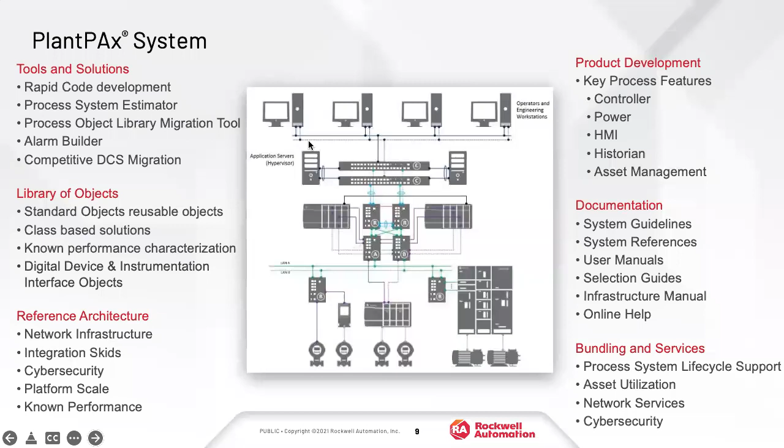So realistically, a lot of the times what we'll see as part of a PlantPAx system are the tools, the libraries, the standardization of all the blocks and objects that we have, tons of documentation around reference architectures, and then also key releases that we have specific to either the process controller or things of that nature. So as we go through, we're going to be talking a lot about PlantPAx, but it's not going to be specific to just that. We can use a lot of these tools outside of that, because in reality, what we're looking at is CompactLogix, ControlLogix, Studio 5000, FactoryTalk View SE, Historian, and AssetCentre. All of those are part of our process system that we'll tie into.

When we look at a modern process solution, like I said, we are looking at PlantPAx in the foreground, but as part of that, PlantPAx is a characterized system. So all of the documentation, the tools, the mechanism of how we implement the system, everything has been characterized and documented.

So a lot of the tools are built around that. Application Code Manager being one, so that allows us to do the bulk code instantiation. The instruction sets, so we have the process library that you can import and export, and you also have the new instruction sets that are going to be tied specifically around the newer controllers, how we handle alarming.

And then in terms of what we're seeing on the bottom end side, again, integration into power, integration into motor control, the ability to do redundancy. So typically my joke is how much redundancy is too much redundancy. We are seeing that here in the process system where we have redundant controllers, redundant IO, the ability to do redundant switches and servers. It just depends on the application set that we're looking at.

And then even safety and the scalability piece, as we go through, we can scale this down to a single station solution where it's a single monitor, single controller, all the way through a full control room environment, multiple servers, multiple controllers. We actually have an example architecture at the end, just so you guys can see some of the capabilities.

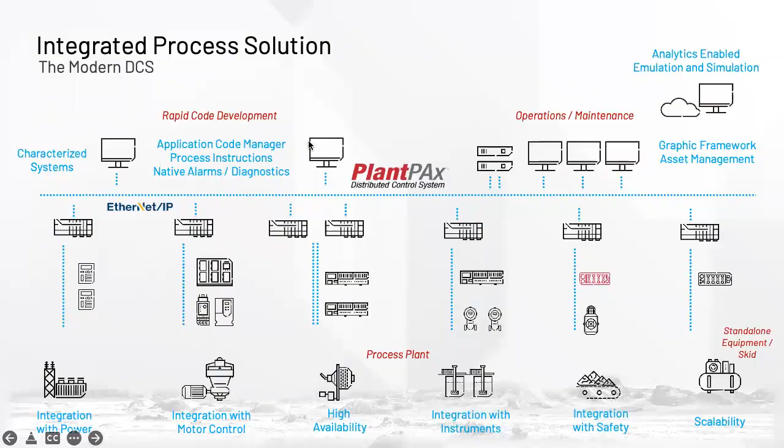But in terms of what we're looking at for a newer update, as of June, we will have the release for 5.10. So this is a smaller system release update to PlantPAx. When we do the release, Rockwell will also release documentation that goes with it. So as I mentioned, it's a characterized system, meaning that they've now characterized it to all of the new feature sets and the newer software packages that they're going to be coming out with. Along with that, some of this has already been released. It's just a matter of having that documentation that ties into the process side of it.

So last user group, we talked about Logix Echo. That allows us to do emulation of a process controller. So that'd be the newer high performance ControlLogix platform, but the process variant that can be emulated inside Logix Echo. So you wouldn't need the actual controller to be able to do an HMI and code implementation.

A couple of the other things that you'll see there: power integration. There's a new ProSoft module that allows you to do 61850. So usually it's a Schweitzer relay or switchgear kind of communication that ties directly into the ControlLogix platform. Some updates with how we handle OPC UA alarming and security. That'll be built into the documentation.

And then what we'll talk about in a little while is some of the newer updates to the infrastructure. So the virtual templates that we create on the Rockwell side, what we implement for PASS is Process Automation System Server. So in layman's terms, it's the FactoryTalk View server image. We'll have a consolidated version. The consolidated will also now include Batch. So you'll have FactoryTalk View, Historian, AssetCentre, and Batch all in one virtual image template. You can either do that in a virtual environment or a physical box.

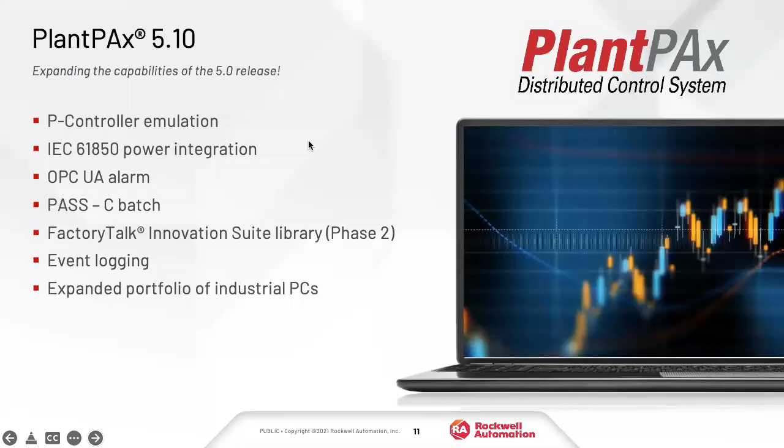In terms of the process controller, if you guys haven't seen this already, more than likely you probably have. In CompactLogix and ControlLogix, this is the newer high performance feature set. There's now a process variant. This released as version, I think it was 33. So it was October 2022, I believe. So these are going to be process out of the box.

A few of the changes that you'll see is they got rid of the continuous task when it comes to process. Process is typically using periodic tasks, so it also defines the speed of the tasks that are being used. The biggest change with a process specific variant is that it has the process instructions built into the firmware. In the Studio 5000 environment, as soon as you load up the firmware on the controller, you'll see a PlantPAx subset of instruction sets already built in. They don't have to be imported or exported.

So when Rockwell creates a PlantPAx 5.0 library set that ties into all of the faceplates and the way that we handle alarming, all of that is tied into the firmware instruction sets that are already built in. So when they moved from V33 to V34, it's part of the firmware update. There's no library piece that needs to be updated outside of that. Everything is handled as part of the controller. So any future upgrades in the process controller, whether it's CompactLogix or ControlLogix, are just updated via the firmware. So that is a huge thing.

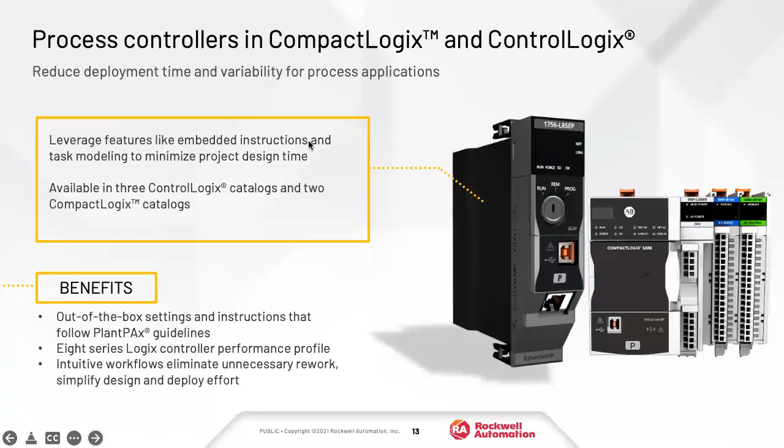Inside of process, whether we're talking about PlantPAx specific or just process in general, we can still support architectures with an L7 or an L8 standard type controller. But if you are looking for the feature set where you keep that instruction set built into the firmware, it would have to be the process controller. So just keep that in mind. Some of the features that we'll talk about are going to be specific just to the newer controllers, not necessarily to the process controller.

So as more things are added to PlantPAx, that'll be added in later firmware? Right. Correct. Yeah. Firmware levels are better aligned, so I don't have to say, okay, version 34, what version of PlantPAx is it at? Correct. So at some point it gets more recognizable.

Yeah, so the idea with the PlantPAx system releases, like I mentioned, they released 5.0 as of June. They'll be at 5.10. Part of that characterization is telling you what version of Studio and controller firmware you should be using, including all of the software packages. So when 5.10 rolls out, they'll also update the revision of what controller you should currently be at, including version 12 or 13 of FactoryTalk View SE, Historian. All of those pieces will come bundled in.

So what they're planning on doing is any newer releases going forward, because what Rockwell will probably do, if I'm seeing the writing on the wall, is they had the 5.0 release, they'll have a 5.1. I fully expect them to have a 5.2 once they have newer updates. Anytime they release new updates, they'll update the documentation and potentially move that into a new firmware update specific to the process controller.

There's a migration path if you have an L7 or an L8 and you want to move to that same feature set. But what Rockwell is trying to do, as we get into more of the process or PlantPAx space, is tie that directly into the firmware releases so that it's an easier transition moving from one system to another.

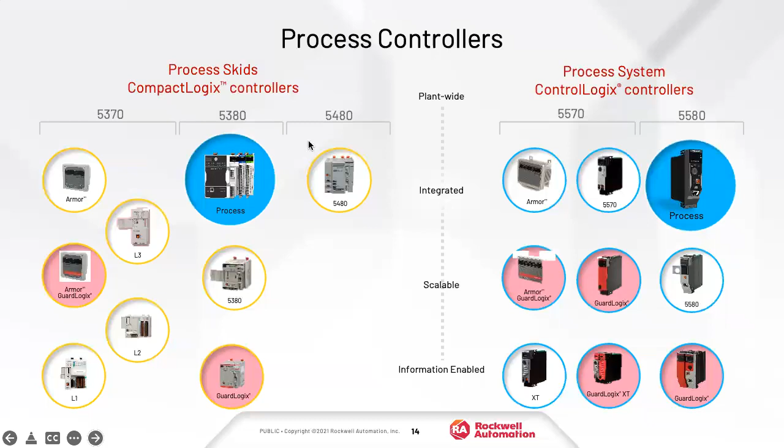Oh. There we go. In the newer controllers, this does not have to be specific to the process variant. So this is looking at the 5380 or the 5580 ControlLogix, CompactLogix. We've talked about this in the past, but it's worth repeating. One of the bigger updates that we've seen as of version 33, 34 for Studio 5000 is the implementation of automatic diagnostics. So what this allows us to do is it's an automatic push from the controller to the HMI. So FactoryTalk View SE will automatically get information regarding the diagnostics part of it. It's using the alarms and events portion, but this is essentially just a little checkbox inside of the controller to say enable. It's automatic diagnostics, something or other.

So what that allows us to do is now see broken wire status information, and it's not only the controller status, but it's also the adapter and the IO per channel. So in the past, most of you probably have created some type of GSV to get the status of an IO card, or created special AOIs just to do that. Now it's built into the system using the newer feature set. So it has to be the newer controllers, and it has to be the newer IO as well. So we're talking Flex 5000, the machine IO, so the 5069 flavor of the IO, all of those are capable of it. You will not see this with the older style IO or the older style controllers. So another reason why when we're looking at modernization, we're trying to push to make sure that you guys are at version 33 or above.

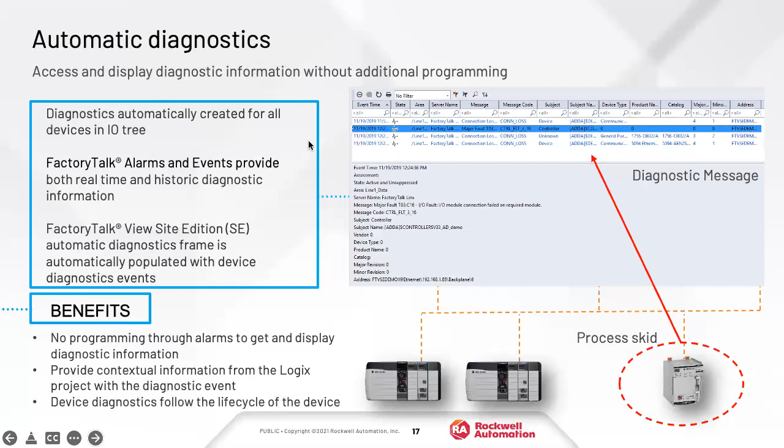Update on HART. Again, this is specific to process in general. It doesn't have to be specific to PlantPAx, but it's what comes along for the ride. As they do updates to PlantPAx, we are getting all the new tools and feature sets. This was introduced as of V31 and is specific to the Flex 5000 family, a new feature set that only exists in the newer technology.

When we're looking at Flex 5000 and the newer controllers, the 5380 and the 5580, this now ties in, and they call it highly integrated HART. We still have the capability of bringing in all the HART sensors. We have specific IO cards that are analog HART modules or analog out HART modules. What this is doing is that the HART device is now part of the IO tree.

So in the past, you've gone into the IO card, set up the configurations that turn on the HART, and you're getting the process variable along with all the HART variables. It didn't necessarily specify what device was on the other end. You would have to use something like AssetCentre or an AMS system.

What they're doing now is inside of Studio 5000, in the IO tree, you would actually get a full listing of all the devices that are being tied to it. The devices themselves will come with an add-on profile, so you can double click on it and you'll get a full little window. Eventually, it'll get to the point where it's doing the same thing that AssetCentre was doing, where you can see a full device manager inside of Studio 5000.

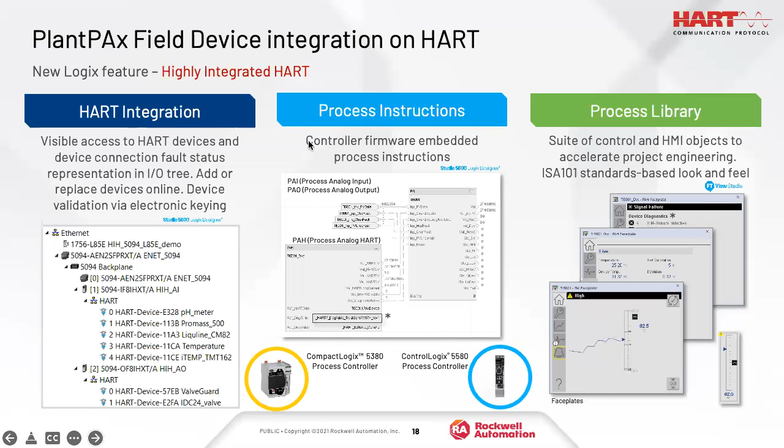Another feature that we typically have not covered, and it's something for anybody that's doing either PlantPAx systems or just a process system in general, as we move towards integration into FactoryTalk View, what we're also looking at is the ability to own and organize based on equipment design. So a lot of the time in a process environment, we're doing a lot of loop tuning. So you have dependencies from a valve, a motor, a block, those analog signals.

What you can now do is implement an actual organization structure that's built into the HMI itself once it's all there. So if you have any dependencies where something needs to start up before you get an alarm somewhere else, you can now do that arbitration and do it directly from the FactoryTalk View SE system. So that is built into the tools as part of PlantPAx. Again, it could either be part of a full DCS environment for a larger system, or you can just be looking at this from a controller to HMI system with FactoryTalk View as a full process implementation.

So documentation is already there. If you guys need to do some labs or get a little bit more information on it, just let us know.

Sometimes this is used in some regulated industries where you have to provide some kind of documentation about arbitration or about ownership, like in pharmaceutical and those kinds of things. If you're familiar with the S88 documentation standard, that's what this allows you to follow easily. So it may not be so much in oil and gas, but in some of the regulated chemical industries and pharma, you might see this. And so it just helps in the organization of your HMI development.

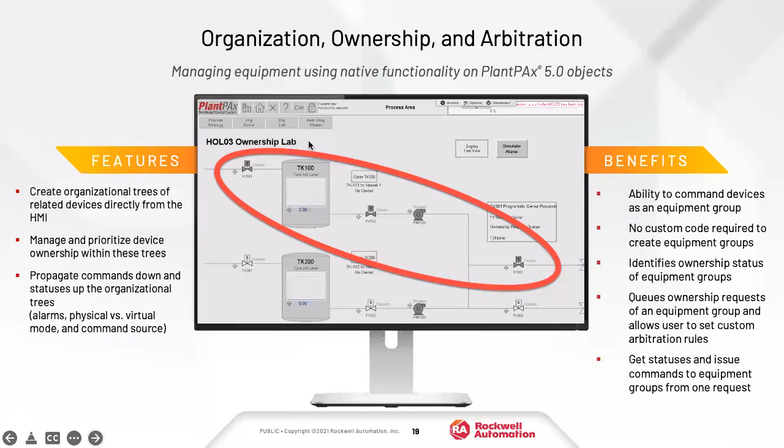As far as implementation, if you guys are following PlantPAx letter of the law, there are documents that you are fully expected to read. I won't actually ask you if you did, because I don't want to get sad. But there's documents in here.

So anytime they do a system release, as I mentioned, there was a 5.0, there's a 5.1 selection guide, configuration and implementation user manual, and then also a full listing when it comes to the library objects. This is going to be specific either to the instruction sets that are built into the process controller or to the library that exists outside of the process controller that you can import or export. So that provides you all of the information, a lot of the documentation that you can get into.

One of the examples that we get into is if anyone starts asking about how do we set up security inside of process or PlantPAx specifically, usually what we see from Rockwell is following the IEC 62443. Specifically on this one, it's the 3-3 compliance. So this is how we actually implement the system. So when we're looking at how do we handle access control, the zoning, the conduits, the tie-in for the implementation of FactoryTalk security, all of that is documented inside of that same document that I mentioned.

There's a little appendix A, which is a PlantPAx security certification. So you can go in there and it gives all of the examples and what you're supposed to tie into, even how you're supposed to set up some of the networking devices. So it's documented, it's there. So anytime you guys are looking at it or a customer is asking about it, this is where we would go on the Rockwell side.

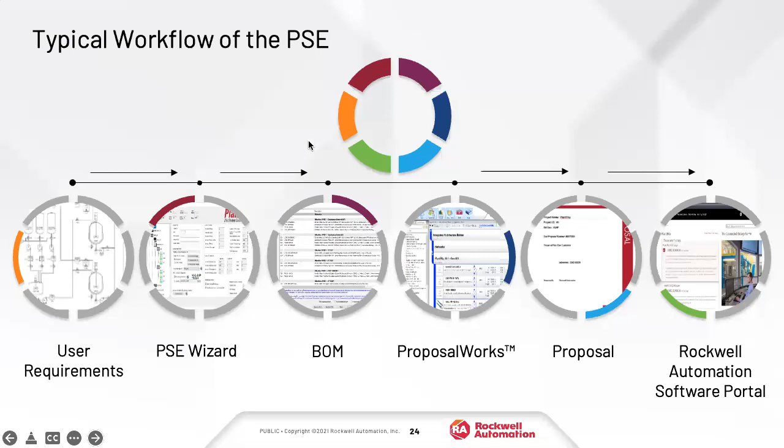And anytime we are looking at a system integrator that is doing a full PlantPAx 5.0 system, that is one of the main requirements, that it has to go through the process system estimator and have that fully documented. Once we get that, we have the bill of material, we can go into a proposal, and then we go through the system of how we're going to order everything. Same thing when we look at this. So that allows us to define hardware.

It's not only the controller, but it's also the networking piece, the software that goes with it, and even the server configurations. So if you're thinking of doing a full virtual system with ThinManager, thin clients, a bunch of remote sessions, all of that would be documented as part of the bill of material, including how we would go about putting a network together. So just be aware that it's probably a little bit more powerful than you're used to.

On the integration side of it, we also have configuration tools that are specific to PlantPAx. So again, you can use those for your standard process design. These are how we would set up the interlocks, how we set up the alarms. And then at the end of a system, once the work is done and you're getting to the point where you're doing a FAT test, a SAT test, there's tools in terms of PlantPAx and process for a verification validation tool.

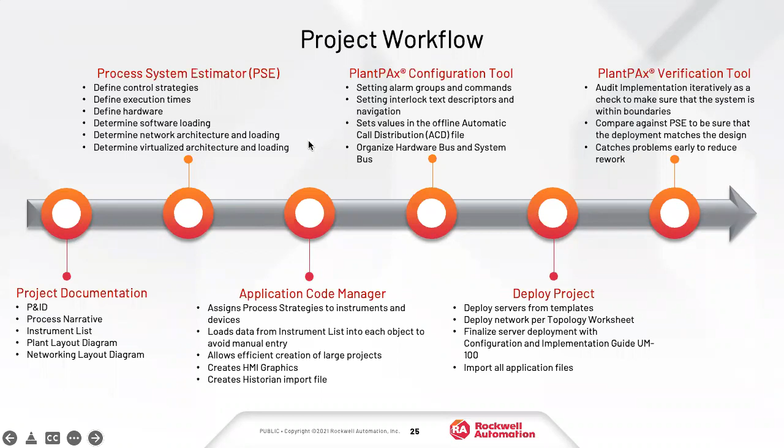So these are, last I checked, about 8 spreadsheets that allow you to tie into the control system to make sure that everything that you said you were going to do in the estimator actually came through, as far as how you did the design, how you did the system, and make sure that you're green across the board, essentially. So if you haven't seen those and you are doing a process or a PlantPAx system, I urge you to get that. They're in the same spot where all the drawings are. So in that documentation, at the beginning part of it, there's a little link that allows you to pull down a little verification tool via the knowledge base.

One update that came out as a part of PlantPAx, and it's a big one when it comes to how Rockwell is implementing their systems, is there's now what's called a system ID. So if we're looking at a full process system, typically the support structure for Rockwell was, okay, you have controllers, you have switches, you have software, everything is separate. So you call in for support and you're calling against a specific device.

So what they're moving towards, especially in a PlantPAx DCS environment, is to have a unique identifier for the entire system. So when they call in for support, it's tied into the entire system. They know everything that's there. To get to that point, we use the process system estimator, pull that into proposal work so that we have a tie-in. There's a bundle that gets purchased through the software portal. It's going to be specific to PlantPAx, so it's the PlantPAx software bundle.

And the unique identifier will be the serial number for the process automation system server, which is, again, FactoryTalk View SE. There are mechanisms to be able to take older systems, move them to newer systems and get a system ID. There's also ways of being able to buy everything piecemeal and still have a system ID, but you have to go through steps to make sure that happens. Typically, what we're trying to do is any newer system that's going out, if it's PlantPAx, you buy the bundle, you go through all the steps, you get it audited afterwards.

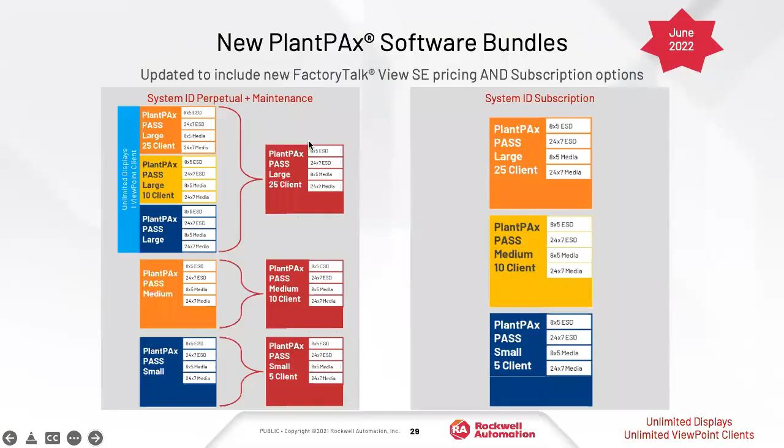So one question that came up is: on the Lite stations, do the standard PlantPAx objects count towards a display? Yes. If we're looking at just a 25 display count, typically when we're bringing in the process library or even the library that exists for the instruction sets, we're at a count of about 80 faceplates. Granted, you don't have to use them all. If it's a smaller application set, you can get rid of anything that's not being used, but you have to do that extra work and understand whether or not you can fit that in a 25.

I will be honest, if we're talking PlantPAx or even some of the process systems, I almost always want you to be unlimited. So take a look at the pricing that's been updated, because in most cases the unlimited is still at an extremely competitive price point now with the update. But yeah, if you're at 25 displays, anything that's a faceplate, a trending screen, a navigation screen, all of that goes against your count.

If you're doing the, we'll define stackable, you're talking about like buying two? No, because essentially SE still doesn't let you do an additive piece, so you can't just add display counts. If you were to buy 2 Station Lites, you're essentially installing that on 2 separate PCs. Right. So you would have to split the system. Let's say you had 2 PanelViews and you split the system so they're doing independent items.

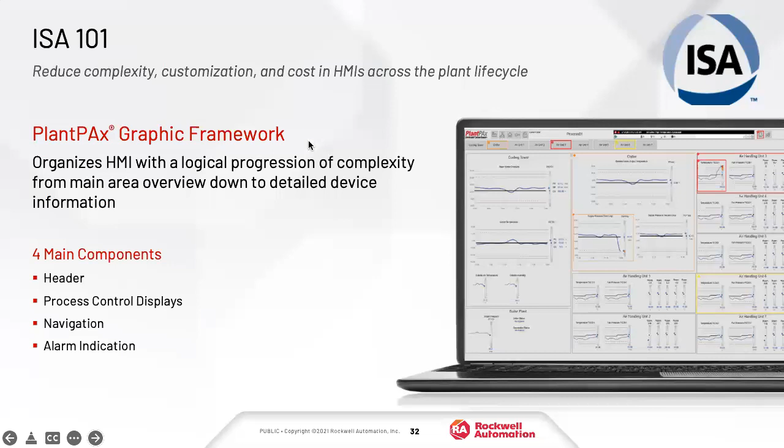And we're seeing customers, end users, OEMs, et cetera, that recognize the significance of this, and this is driving some migrations and opportunities, because they're recognizing that maybe their facilities are not run in the most efficient or safest way they could. And so we're seeing a lot of customers adopt this ISA 101.

And so the research says that trends are good visual tools to show an operator what's normal. So you have a trend that would be in a kind of a normal band, and then you have sort of abnormal bands. And these are typically real-time trends. They go back a certain amount of time, maybe 10 minutes, maybe an hour, depending on the process. So an operator can look at that trend and say, oh, that doesn't look like it normally does. Let me click on it. And then you can go into a deeper or more focused screen.

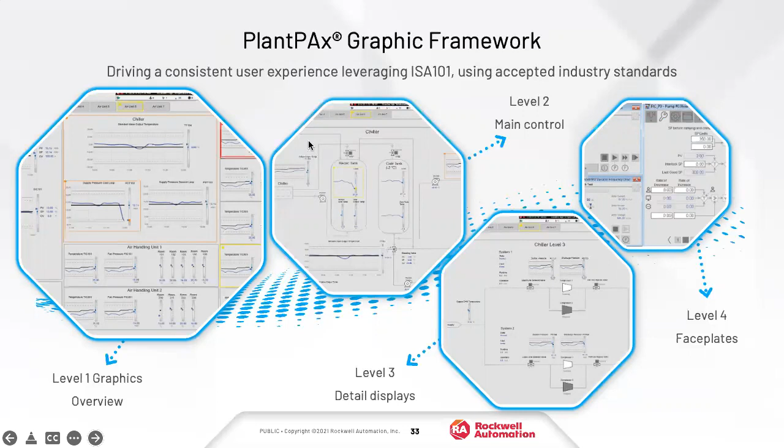So a red would be something, maybe a high alarm. And so you'd want that operator to be able to simply select the buttons where the red lights are on, and that's going to take you to where the problem is. That's the concept of what we call breadcrumbs. This is all built into PlantPAx and how the faceplates and the instructions work, and it's just something that gets configured as you develop your HMI package.

A cool little feature that you don't normally think about: when you're looking at the navigation side of it, the little black bars are actually telling you what level and what screen you're currently in. So when you're seeing the entire graphic framework, not only are you seeing the breadcrumbs of any alarms or actionable items, but you can quickly see what area and screen you're currently at within the different levels David was talking about. All of that is built into what Rockwell created, and it's all available for you, including all the documentation. So it's not anything that you have to create.

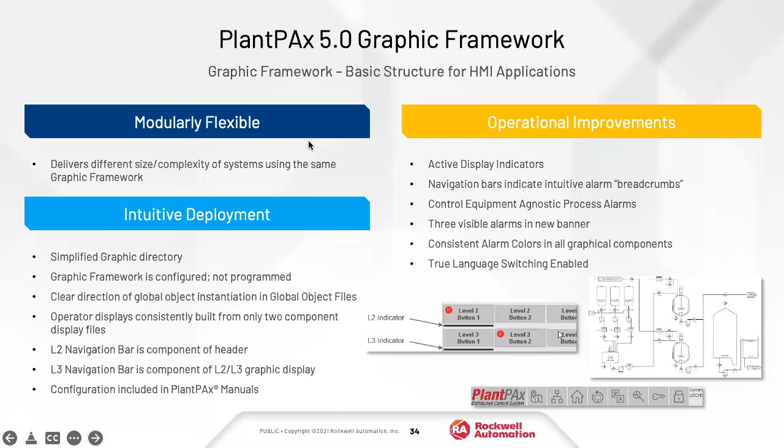Right. And so certainly alarm management is a critical piece of ISA 101. Like we showed in the beginning, in the top area you're always going to have a small three-row alarm banner on top of every screen. So again, if there's a red circle up there, it's something you might want to investigate further. You could click on that and get to your full alarm summary, and in the alarm summary you can do all kinds of things and manage your alarms that way.

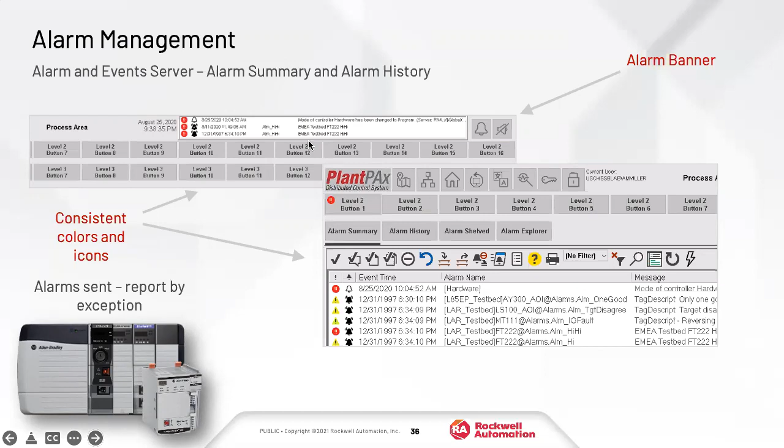You could layer hardware IO diagnostics on top and look at it on a display screen. So if you had a transmitter that was out of whack, maybe that diagnostic would show you there on the screen: oh, I lost this point, I need to go in and change my IO module or something. The ability to layer event data on top of historical process data is a nice feature, so you don't have to go hunt and peck somewhere else to troubleshoot what's going on with the system. That came in, I think, in version 11, and now we're on version 13.

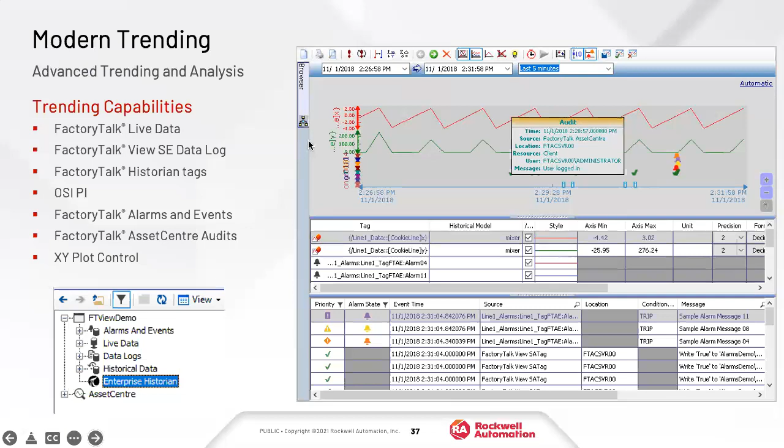Analytic reports. Rockwell has a whole suite of analytic tools that are compatible with PlantPAx and with our controllers in general. That's probably a topic for another whole user group, but there's a whole series of ways to get data to the cloud and to the different analytic tools Rockwell offers. One of those would be to do reports. There are a couple of different ways to create analytic reports. We fully support SQL Server Reporting Services. We also, in our process historian, support using the asset framework inside the historian to build reports.

Third-party options as well from our process or business partners out there. A lot of ways to do that. This is just some screenshots. One of the things that Rockwell came up with last fall was to add another analytic option to your historian, and we call that Historian Vision, which is really a brand label of PI Vision, if you're familiar with PI.

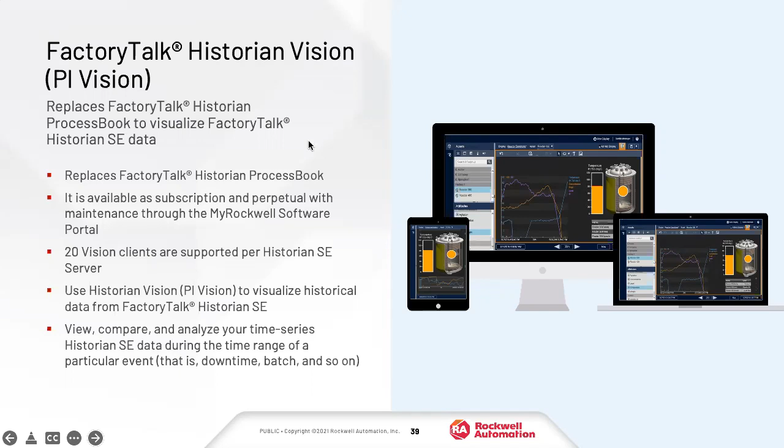So that's a whole other analytic set of tools that will communicate directly to the FactoryTalk Historian SE. What's nice about these is they are sort of client agnostic, so you could run Historian Vision on a PC. You could also run it on a tablet or Apple or Android device, and look at reporting and trending and that kind of thing. So that's just another tool that is now in our suite to do analytics. So this slide here just gives you an idea of an option of doing reports.

Let me grab some tea here. Yeah, so if you're looking at this one, I'll take over while you drink.

So in terms of process, PlantPAx, when we're looking at the process controllers, obviously that's not going to be specific to just process, but we're looking at all the ways that we can pull out the tags, all the alarms, the capabilities there. So the PASS server, again, that's process automation system server. It's a fancy way of saying the HMI server, the FactoryTalk View SE. We have Historian, AssetCentre. All of those are separate databases, alarm and events from a historical side of it, your historian trend information, the audit logs that David was talking about.

So now we have a way of being able to tie all of that in using SQL. So the same reports that he showed where it had a couple of screenshots, that's already pre-built for you. So if you're using the library, the templates, the tools that Rockwell is providing, all of the reports are now created for you. So they're all part of a full system. So as we incorporate everything, you're seeing the alarm information, the historian, AssetCentre, and then you can also do calculated tags using Asset Framework.

So one of the things that Rockwell does is that they also create the data mapping. So as you're creating pumps, motors, valves, you can now group all of that information. So when you create a report, you're pulling up information that's associated to those data points. Instead of having to drag and drop on a trend like you're used to, customers can already have specific reports based off the models that are already created. And so this is one example of viewing reports. There's other things you can do. This would be more of an on-premise process system.

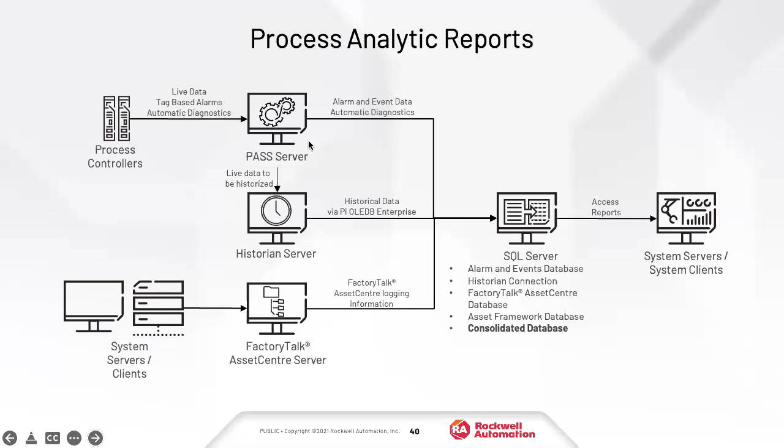So server deployment. Those of you that are familiar with PlantPAx already know that back in 4.x, we released a consolidated process automation system server. So that's for smaller applications. That is for a system that has certainly less than 2,000 IO points and doesn't have a lot of clients. Maybe a small application, could be a skid or an OEM type of system as well. But you can put a lot of that functionality into one box.

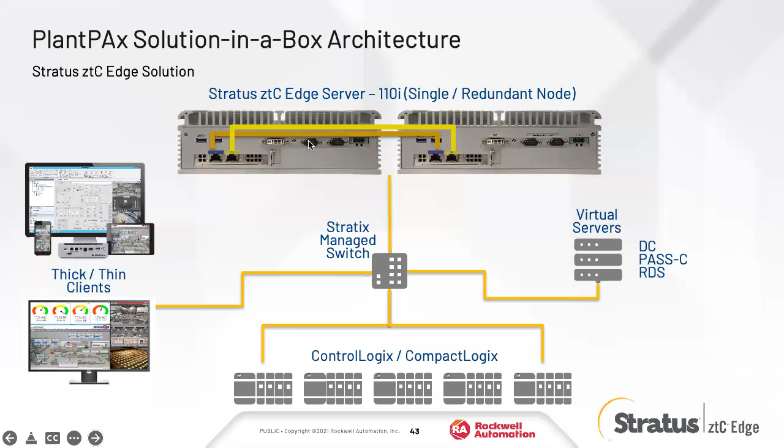Okay, so I think we're getting towards the end, but one thing we wanted to cover was what is available to you guys as partners, as users, et cetera, mostly for partners. Rockwell, for quite a while now, has a website called Rockwell University, or RAU. Up until this point, mostly that was available for Rockwell employees and also distributor partners like Reynolds. That's where we did a lot of our competency training. Rockwell is starting to extend that now a little bit more. So our system integrator community partners now have access to it to do some of the competency training that Rockwell is now asking of system integrators to reach levels in the system integrator program. So there's bronze, silver, gold, and platinum system integrator levels now.

So that's something that now we're introducing to our partners. So that's on the Rockwell University. So those are all the trainings; the basic competency trainings are there at the university.